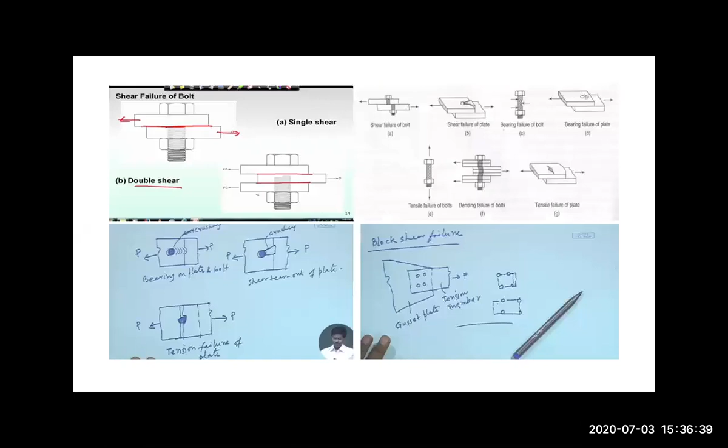Okay. Last lecture we have seen the failures of the bolted joint. So these are the 7 failures of the bolted joints. Now, today we are going to learn about the load carrying capacity or design strength of the bolted joint. So what is load carrying capacity and why we have to find the load carrying capacity of bolted joint?

Generally, for the connection, we are using bolt for the connection purpose. So we have to find out how much load this particular bolt that we have used can carry for

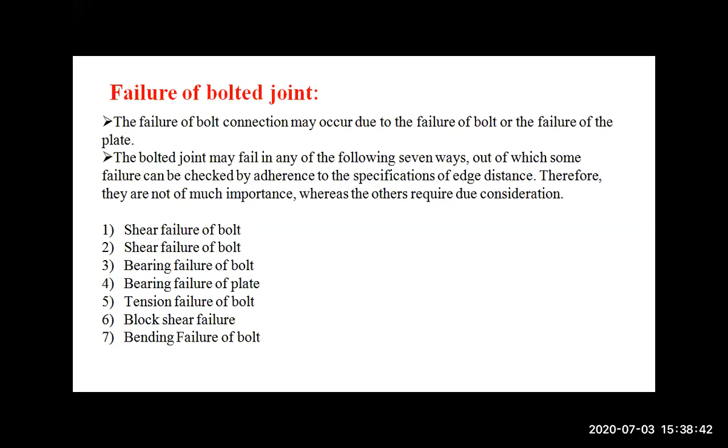For this failure, how much load the bolt will take, that we have to find out, and that we have to find out in the load carrying capacity.

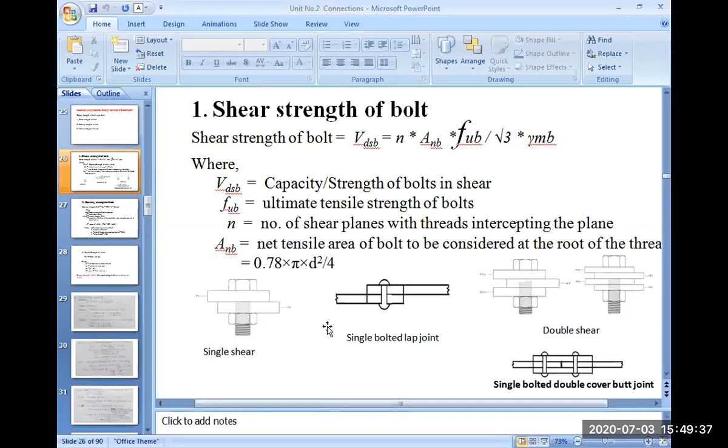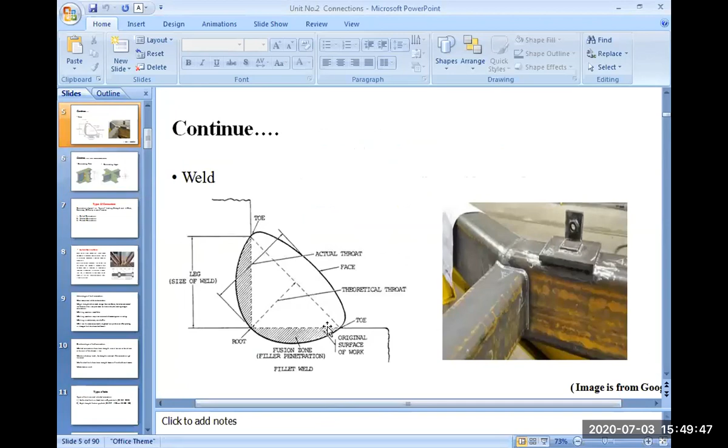Where is this? Here. Okay.

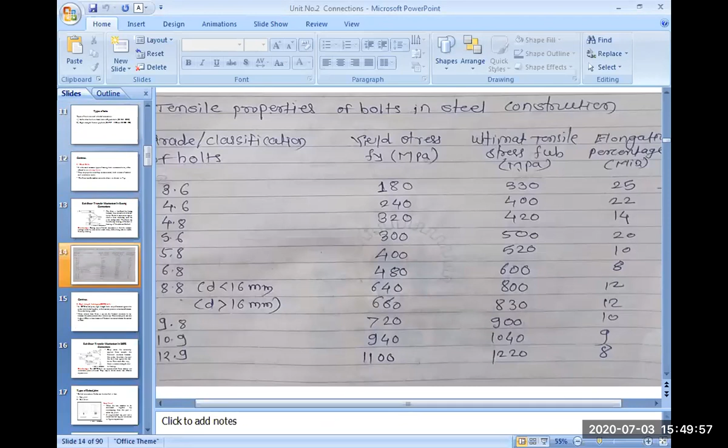Now you can see here, see the grade of the bolt. The bolts are available in market with these grades.

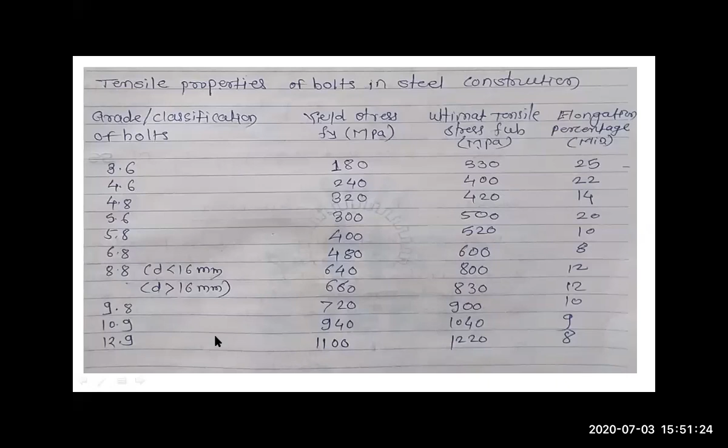Okay, now we will move next. Yes. Okay, FUB depends upon the grade of bolt. Now small n. What is small n? Small n is the number of shear planes.

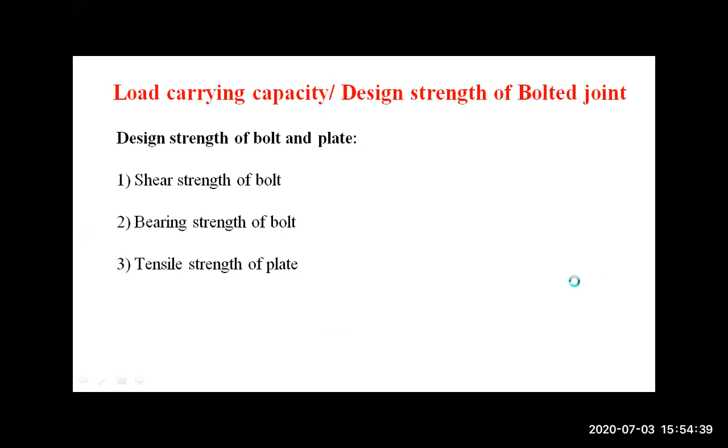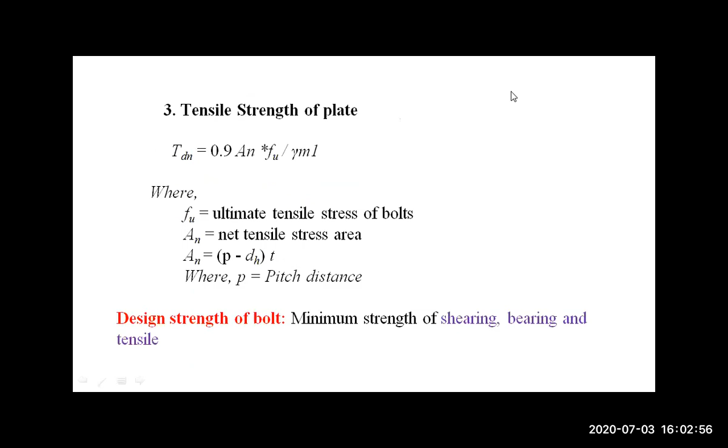Are you getting? Okay. Now, the second strength of the bolt is the bearing strength of the bolt. One minute. Okay, so how to calculate the bearing strength of the bolt? Bearing strength of the bolt is equal to VDPB, which is equal to 2.5 into KB into D into T into FU divided by gamma MB.

One minute. Now, before that, you have written all this. If not, write down this, where VDSB. What is VDSB? FUB, N and ANB. So write down this first. I will wait for 2 minutes. Write down this. You have written the formula.

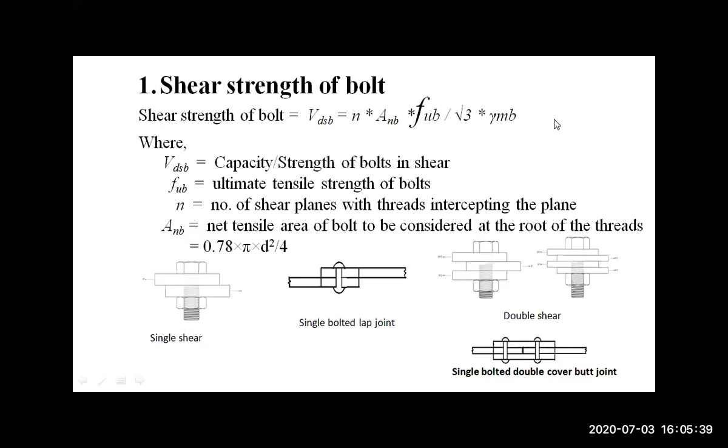Okay, now second is the bearing strength of the bolt. The bearing strength of bolt is equal to VDPB. Here again V is the strength, D is design. Now here P is the plate. Why? Because the bolt is punching or bearing on the plate. So here we have to find out the strength of bolt for punching of the plate. So design shear strength of the plate in bearing. This last B is the bearing. So that is VDPB.

Now, 2.5 into KB into D into T into FU divided by gamma MB. Now what is KB, what is D, what is T, and what is FU and gamma MB? That we have to see. Now see here, VDPB is the bearing strength of bolt on any plate. Here the P is the plate. So bearing strength of bolt on any plate.

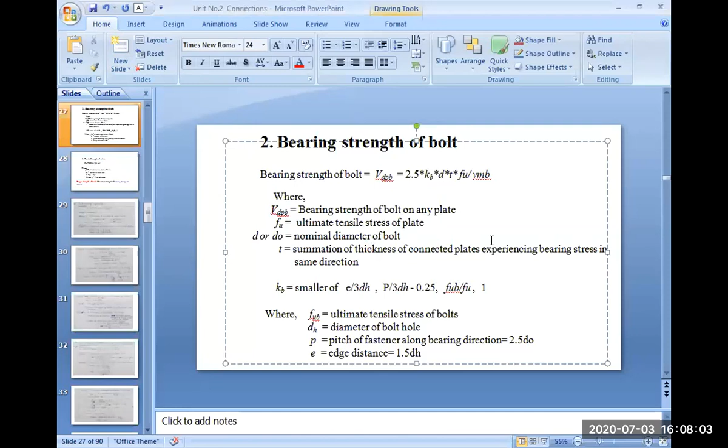Okay. Now that is the VDPB. So what is FU? Sorry, here by mistake I have written yield stress. Okay, is the screen visible? Okay. FU is the ultimate tensile stress of the plate.

Now, here small d. What is small d? D, or we call it d naught, nominal diameter of the bolt, means 14 mm, 16 mm, 18 mm, 20 mm, 22 mm is the nominal diameter of the bolt. That we call d or d naught. Here in the formula they call it d.

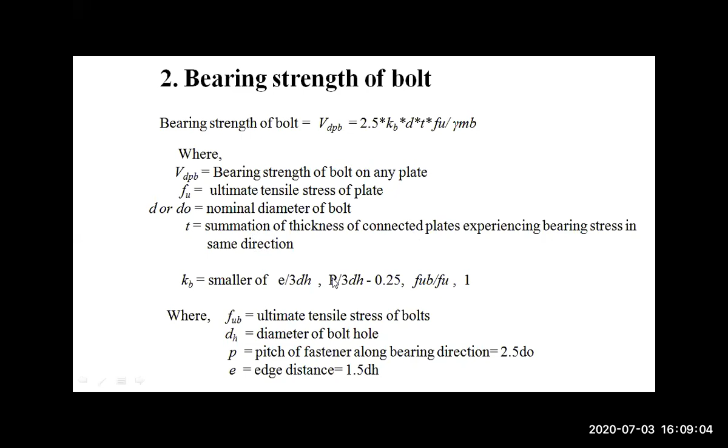The thickness of the plate. So here, summation of the thickness of the connected plates. How to calculate the summation, we will see at the time of solving the problem. Okay, and now KB.